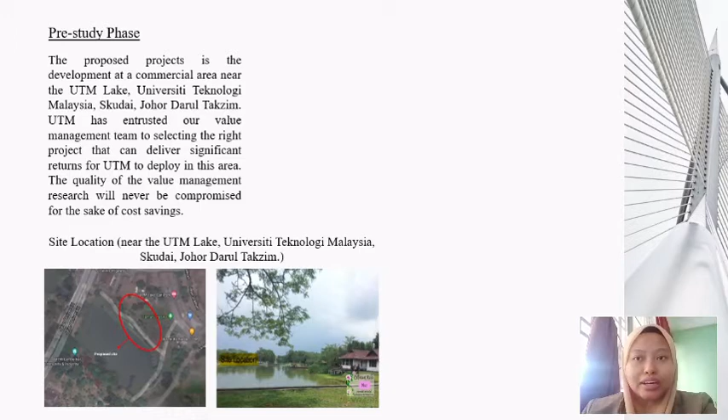UTM has entrusted our value management team to select the right project that can deliver significant returns for UTM to deploy in this area. The quality of the value management research will never be compromised for the sake of cost saving.

Next, this is our team member.

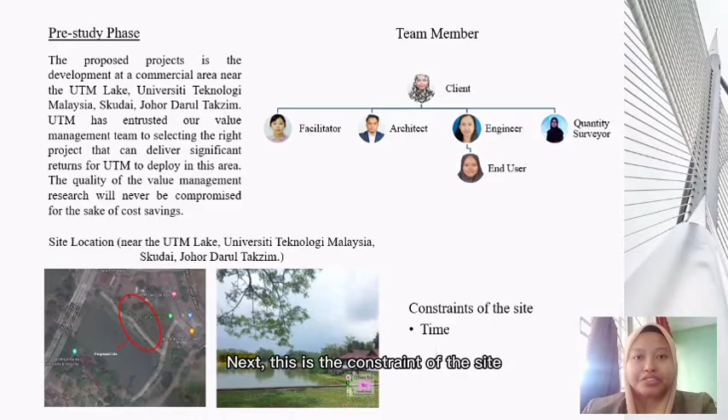Next, this is the constraint of the site, which were time, budget and the pandemic COVID-19.

The project name is Proposed Construction and Completion of a 2-story multi-purpose hall, UTM Skudai Johor, near the Lake. The type of building is refreshment, entertainment and recreation buildings.

Value Management Team recommends building a 2-story multi-purpose hall. The facility, which has a function hall and an open area on the first floor, is available for UTM students to rent out for events such as outdoor activities, dinners, seminars and exhibitions.

The upper floor will feature everything students need, including a gym, a little library, a conference area and a pantry.

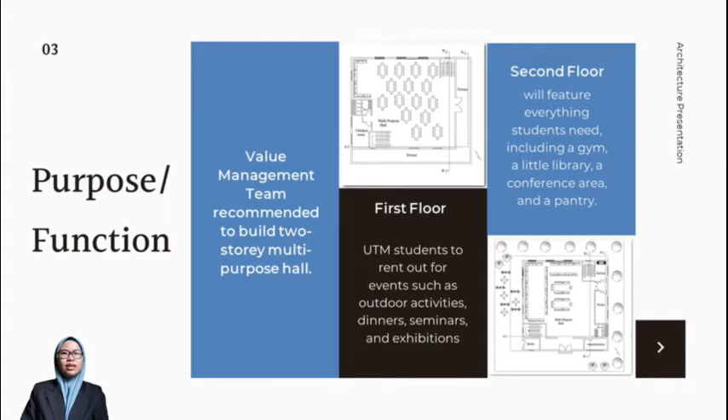Value Management Consultant has taken similar element cost analysis for the previous project, a 2-story multi-purpose hall located at Putra Heights, Subang Jaya, Selangor, as a reference.

Therefore, Value Management Consultant has decided to make an addition to the cost due to the different location of the project, which is the previous project from Subang Jaya, Selangor, and the proposed project at UTM Skudai, Johor.

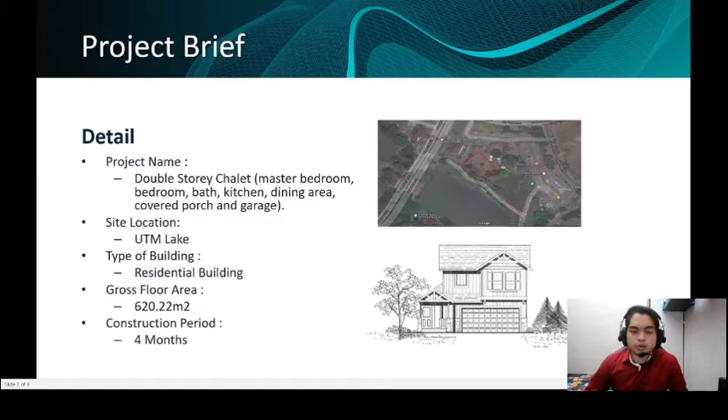The purpose of building this double story chalet is to provide a place for visitors to stay when they come to UTM, especially on convocation day.

With this building we can earn more profit during convocation day because a lot of people will come during that day. Lastly, the double story chalet is easy to operate and maintain because the cost to operate and maintain is lower than other buildings.

For the cost, the previous cost, which I took from the ECA elemental cost analysis from Kelantan, for this building with the same GFA of 620 square meters, costs about 663 ringgit per square meter, and the total cost will be about 400,000.

After we add a new cost according to Arcadis 2020, there is an additional cost of about 120,000 ringgit, and the total cost becomes 530,000 ringgit for the new cost of the double story chalet.

Thank you very much. I am Georgina Bongi and I will present the proposed project number 3, the two-story cafe. This project was based on the ECA from proposed two-story restaurant from Daerah Setiu, Terengganu.

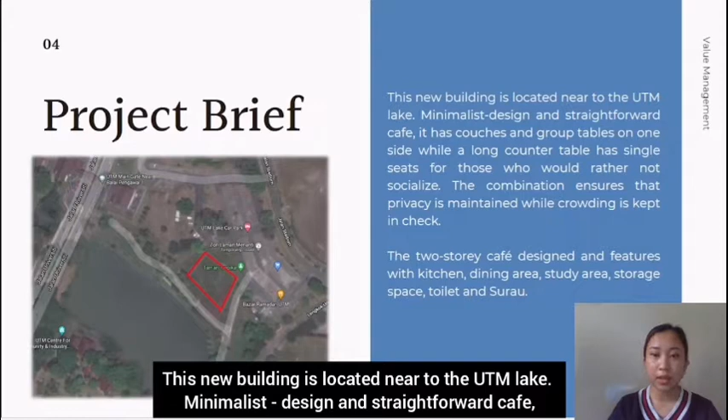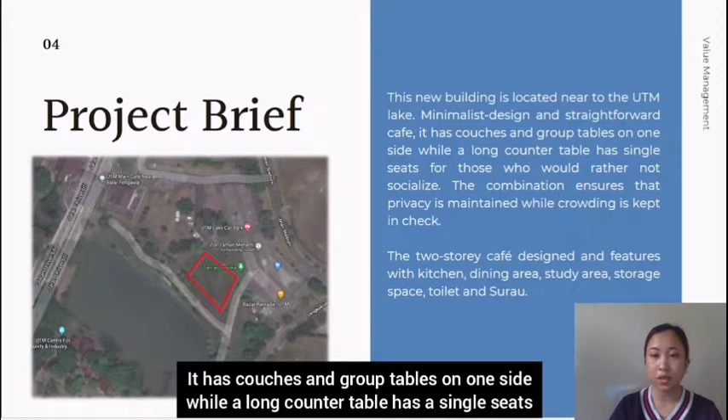This new building is located near the UTM Lake. It is a minimalist design and straightforward cafe. It has couches and group tables on one side, while a long counter table has single seats for those who would rather not socialize. The combination ensures that privacy is maintained while crowding is kept in check.

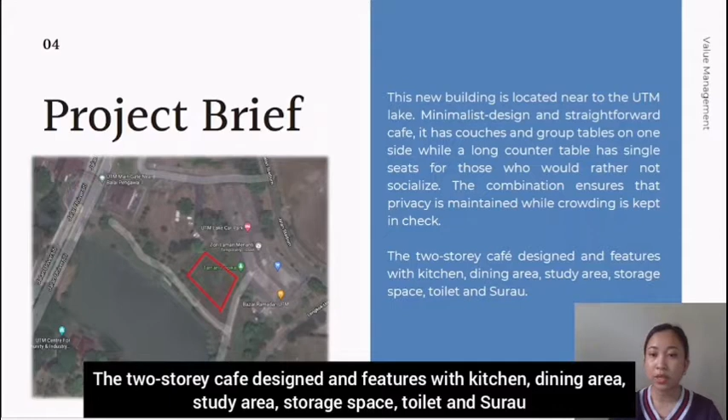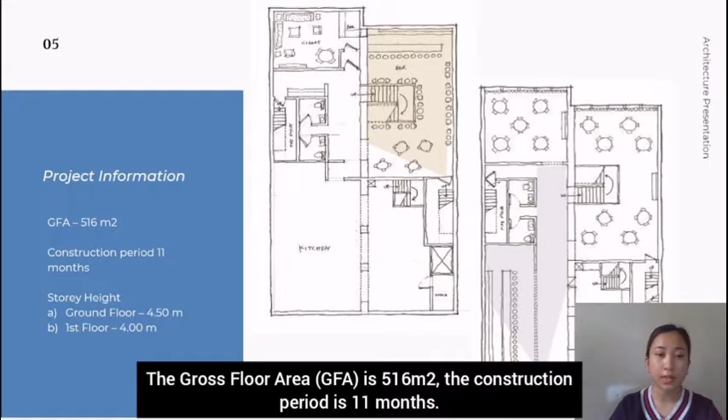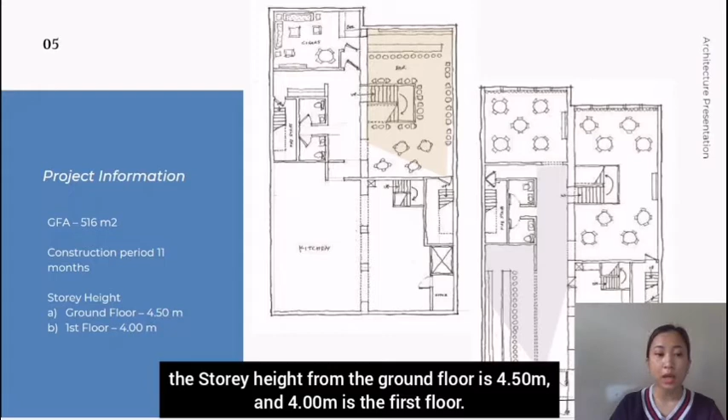The two-story cafe design features a kitchen, dining area, study area, storage space, toilet, and surau. The gross floor area for this project is 516 meters square. The construction period is 11 months, and the story height from the ground floor is 4.50 meters and 4 meters on the first floor. So for the project cost, from the previous similar project, the cost is...

592,444.50 Ringgit Malaysia, and the updated price based on Arcadis 2020 was added, RM 47,395.50 due to the new location. So the estimated project cost proposed for project 3 is...

639,840 Ringgit Malaysia. Proposed project 4, Welcome Center and Gallery. This new building is located at a prominent campus along Lingkaran University Street. The vernacular of this building is varied and represents the image of the university.

The purpose of the Welcome Center in campus is for admitting new students and then providing continual assistance during their academic career, with employment assistance through Career and Employment Service. This building is for educational and information purposes.

The GFA for this building is 405 meters square, story height at ground floor 6 meters, and the construction cost is...

2,594,581. Project cost from the previous similar project is RM 1,783,290.50, and then the updated price from Arcadis 2020, since the building is built in a different location, the cost will be added by...

The first part is the relevant team comment. Our value management team consists of 6 members, and all of us commented on the advantages and disadvantages of the 4 proposed projects. We also shared our opinions on how to improve the proposed projects.

The second part of the evaluation is the criteria scoring matrix. The criteria we agreed to use in this workshop are initial cost, aesthetic, maintenance cost, construction period, construction method, and future profit for the project.

The raw score of each criteria is calculated based on the comparison of performance between each feature. For example, in terms of initial cost and building aesthetics, the major preference of the project is initial cost, therefore it can score 4 marks. The assigned weight is also calculated based on the raw score.

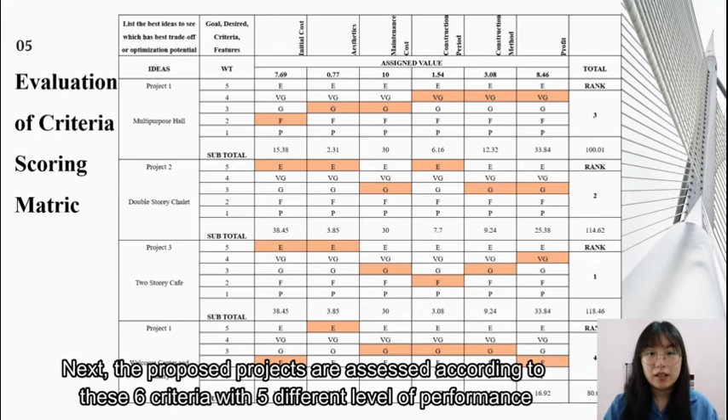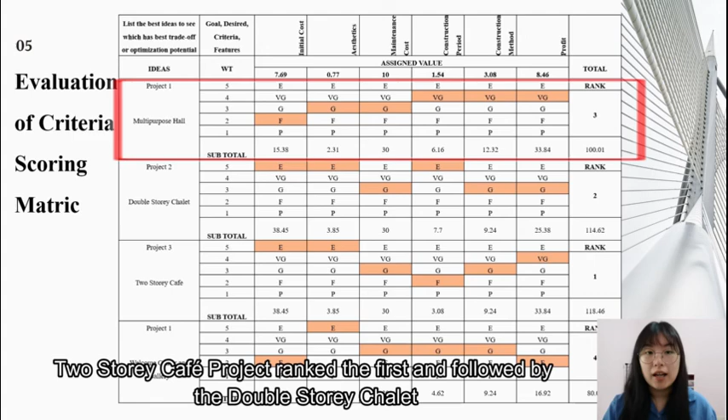Next, the proposed projects are assessed according to these 6 criteria with 5 different levels of performance. Then the marks are multiplied with the assigned value and totaled to conclude which proposed project is the best. The two-story cafe project ranked first, followed by the double-story chalet.

These 2 projects are then assessed by the internal rate of return, IRR. According to the IRR, our team concludes that the two-story cafe project is recommended to be invested in, because of its higher score in the criteria scoring matrix and IRR, which means it has the best project performance and is able to generate the highest return.